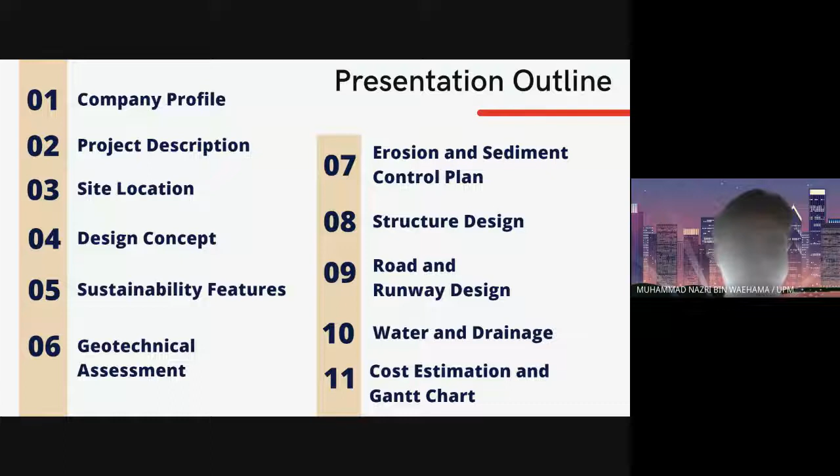Okay, first thing first, our company profile. Trust Maju Consult Sdn Berhad is one of the leading consulting and integrated engineering services companies in Malaysia. Having been established since 2007, our company provides multidisciplinary integrated engineering services.

These include civil, structural, geotechnical and other related engineering disciplines for over 14 years. We embrace innovation to provide clients with innovative, sustainable and livable solutions, solving infrastructure and urban challenges. We work with different clients on diverse types of projects, including aviation, tall buildings, water, roads and highways.

We are very proud to be the designers and consulting engineers with an impressive track record of designing some of Malaysia's most iconic landmarks, including major projects such as KLIA International Airport 2, detailed design and construction supervision for package EF01, Penang International Airport, Sultan Abdul Aziz Shah Airport, East Coast Rail Link ECRL, Kuala Lumpur City Centre KLCC, and Kuala Lumpur Central Station.

TMC is led by a team of experienced professional engineers, with team members registered and accredited with professional bodies such as the Board of Engineers Malaysia and the Institution of Engineers Malaysia.

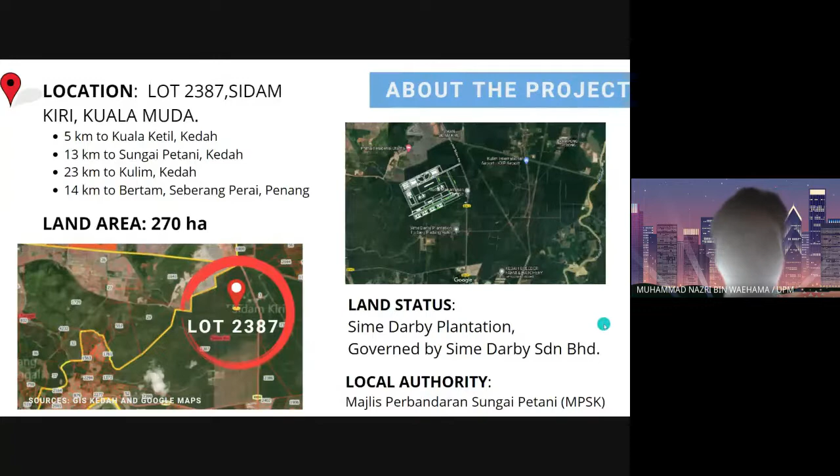We move to the project objective. Trust Maju Consult are the consultant for the project, which is the cadangan membina.

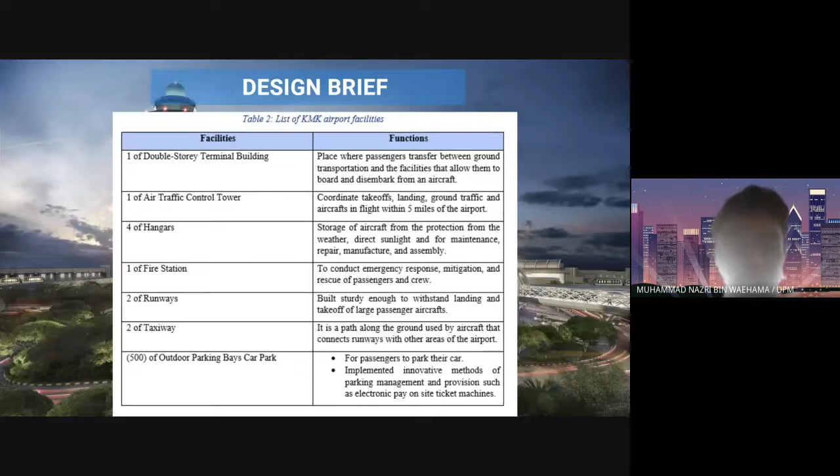Okay, for our design concept. Nazri, can you hold a little bit? Can we have Alia present on this? Thank you, thank you.

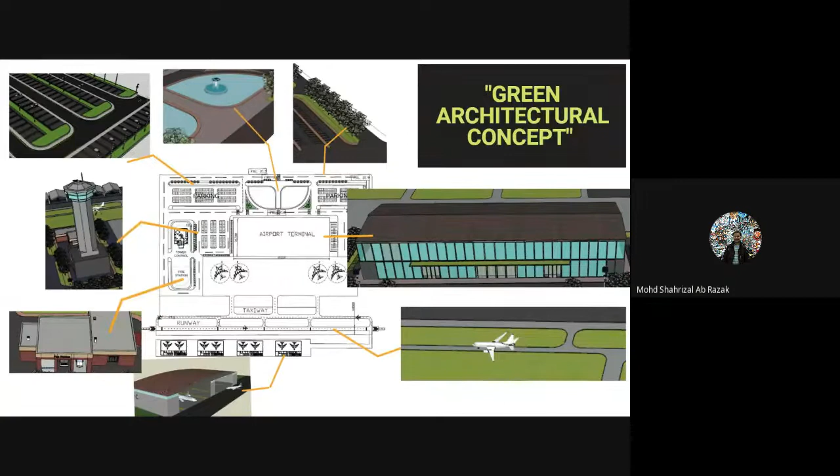Okay, now. Hello, dengar tak? Ya, dengar. So we move on to the design concept.

Our design concept is a very important aspect for Kedah, especially in the tourism aspect. The design of the airport terminal is mainly taken from the concept idea of Changi Airport, Singapore, and also the Tamarind Square, Cyberjaya, with the concept of a green architectural airport.

As we can see from the building layout plan, the parking area incorporates elements of green connectivity. Incorporating green spaces in this urban area is not just adding a touch of nature to the landscape. To maintain this sustainability, it is necessary to have the green roof system that many building structures implement. This green roof, implemented in the terminal airport, contributes to sustainability efforts by conserving energy through insulating the building and mitigating the urban heat, which reduces the need for cooling.

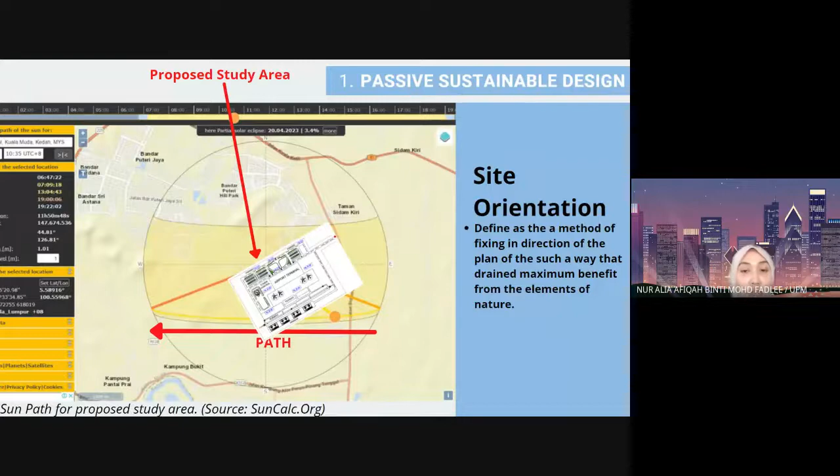As we can see, site orientation is important as it defines the method of fixing the direction of the plan in such a way that brings maximum benefit from the elements of nature. The site location is also placed based on the consideration of more sites facing east and fewer sites facing west. This will ensure the maximum use of natural sunlight and reduce the usage of electricity.

Next, wind orientation also plays an important part here. We can see the effect of wind on takeoff and landing. According to the relevant regulations and standards, it states that aircraft should not land with the wind on the side, nor take off and land with a tailwind.

So it is better to take off and land against the wind, but the headwind should not be too strong. When we determine the direction of the runway, the guarantee rate should not be less than 95%, because according to the Malaysian Meteorological Department, the annual mean wind speed is 1.8 meters per second. This is why we oriented our design like this.

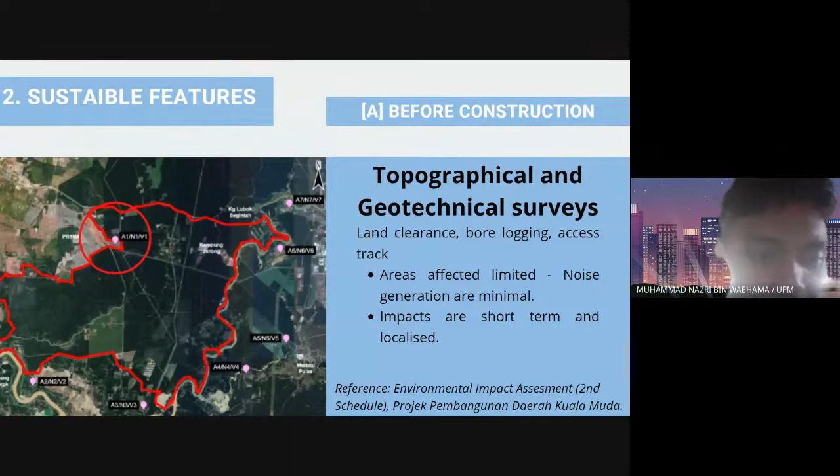Okay, Awad, you present this. For sustainability features, there are three steps. The first one is before the construction, and before the construction, the topographical and geotechnical survey should have been done.

For the land clearance, bore logging, the access track should be identified, and the affected surrounding areas around the site will be limited. Based on the identified sensitive receptors surrounding the project site, attention will be given to the residential area in Taman Sidam Kiri due to its proximity to the project site.

And also in this area, best management practices will be adopted by using low vibration equipment by the project proponent and the appointed contractor during the construction period.

Next, during construction, activity involving heavy machinery, which has high noise, will only be carried out during daytime. Temporary jersey barriers with plastic hoarding will be erected around the project site and active work area, especially at identified sensitive areas. All equipment and machines will be maintained to avoid emitting excessive noise, and development will be carried out in phases to reduce the generation of dust.

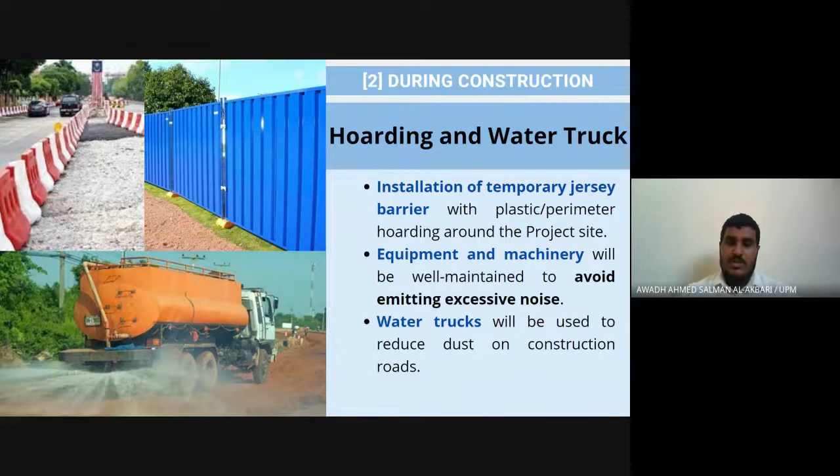Next, after construction, green connectivity spaces will be implemented. Incorporating green spaces in urban areas is not just about adding a touch of nature to the landscape. Urban green roofs or vertical greens and the creation of water features are some approaches to be implemented to reduce the microclimate and reduce the temperature.

The cumulative effect of such practices would bring greater ecosystem services into the urban area, such as improving air quality, reducing storm water runoff, and mitigating urban heat island effects.

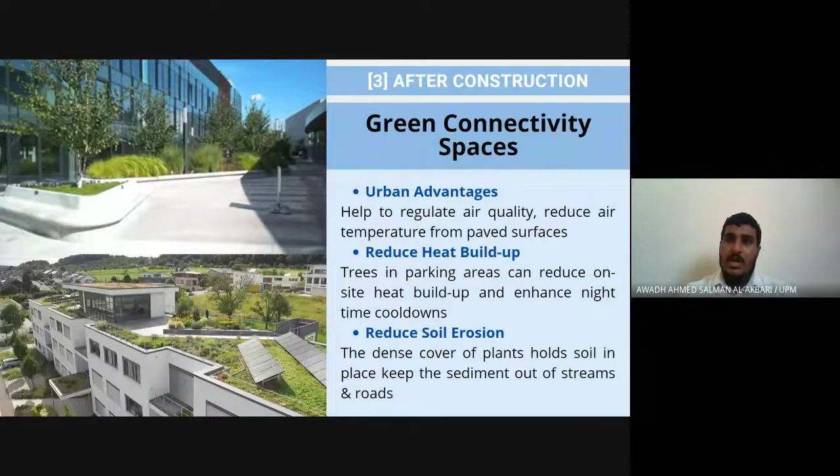Next, here are the geotechnical assessments.

Here I will continue to the earthwork analysis, the second part, the 2D and 3D contour. From the software, a lot of beneficial information can be obtained, such as map contours, cut and fill, and more.

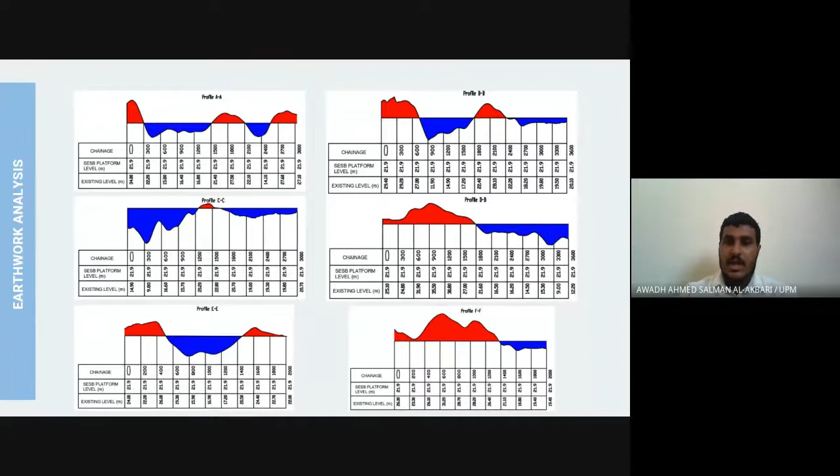Next, here are the cut and fill analysis. From the contour, we did six sections cutting. The proposed level that we have chosen is 21.9 meters.

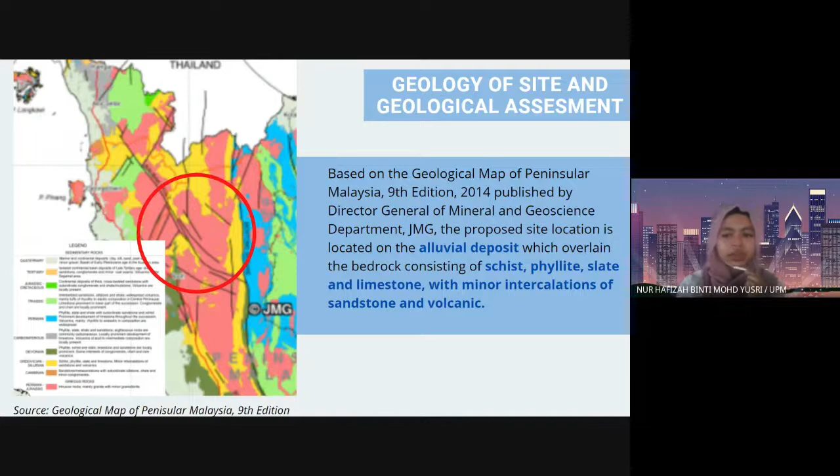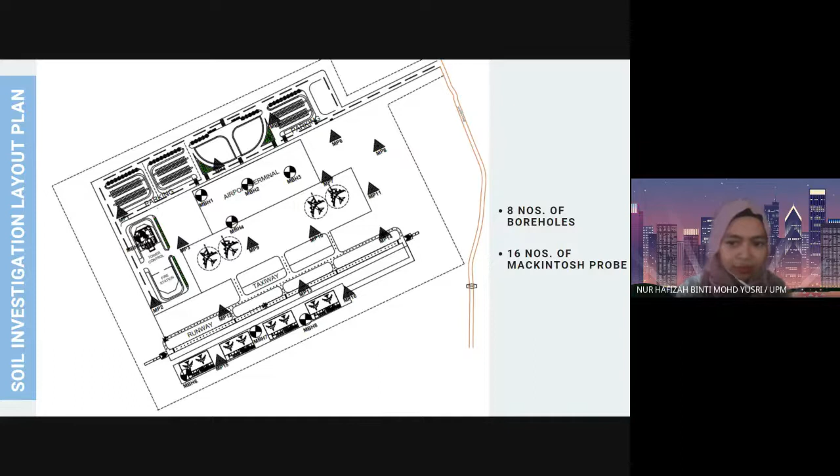This is the layout plan of our airport. This is the investigation layout plan. We propose 8 numbers of boreholes, and 16 numbers of Mackintosh probe.

This is a summary of the borehole profile. We propose 8 numbers of boreholes. The available SI report has only...

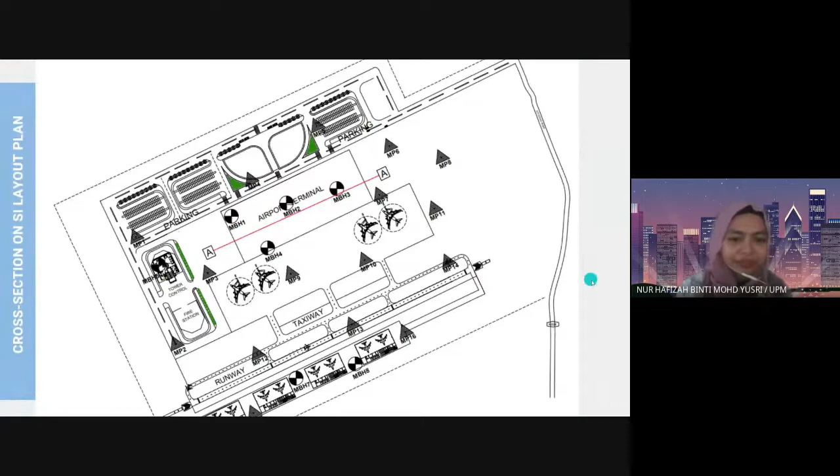See here the cross section AA across the terminal building, studying the soil profile. This is the cross section AA across the 4 boreholes.

Referring to the SPT result in the actual SI report, the top layer can be classified as sandy silt layer, and the middle layer as silty sand. The bottom soil layer is sandy silt. The rock formation beneath is shale.

The layering is further justified by the SPT result. The top layer L1 is sandy silt with SPT-N less than 10 and thickness between 4.5 meters to 9 meters. The second layer is silty sand with SPT-N between 10 to 50.

And a thickness of 1.5 meters to 4.5 meters. The third layer is a silt layer with N larger than 50 and a thickness of 3 meters to 15 meters. The rock layer beneath is shale with RQD of 0%, which is highly fractured and highly weathered.

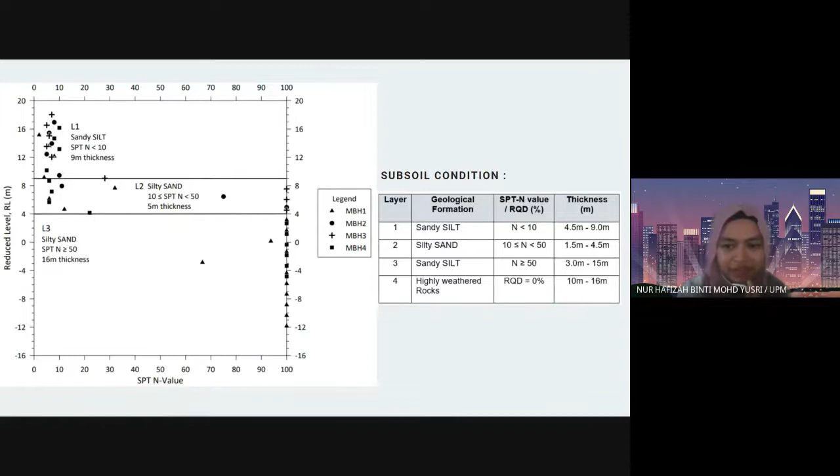This is the physical properties of soil. The plasticity chart is constructed based on the Atterberg limit test result. It shows that the majority is silt with plasticity ranging from low to intermediate plasticity. Clay is minor, with high to extremely high plasticity, with only 3 out of 12 soil samples tested as clay.

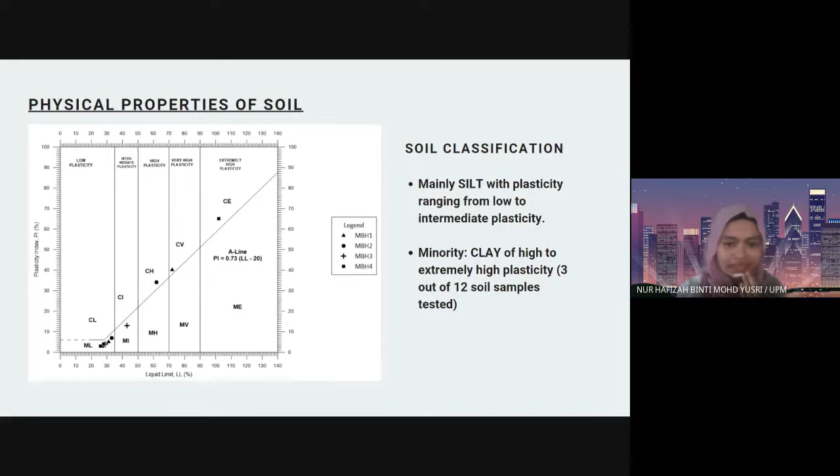Moving on to the chemical properties of soil, there is no trace of acid attack, sulfate attack, or chloride attack. The soil is slightly organic.

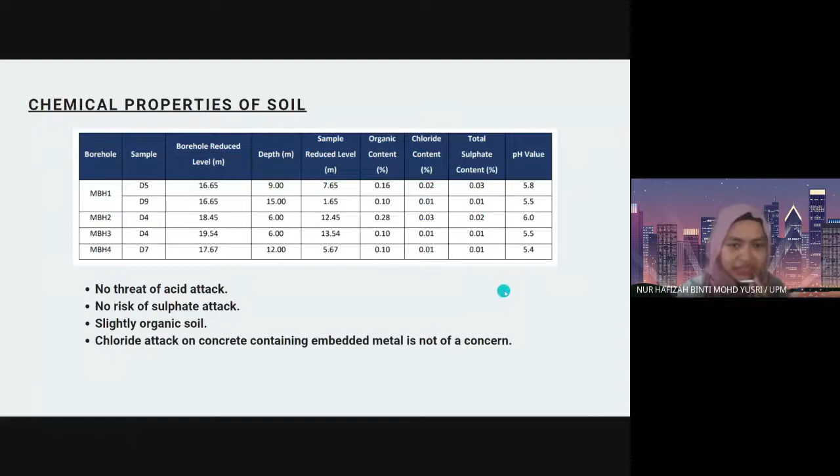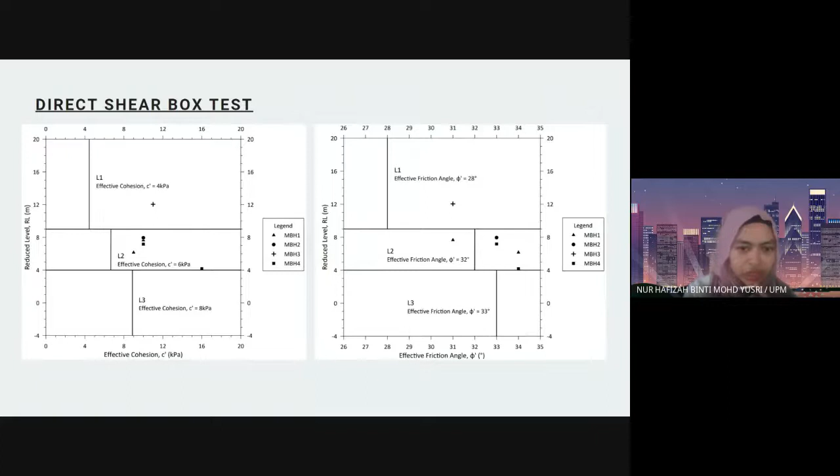This is a summary of a direct shear box test. The effective cohesion and friction angle for each layer is determined, which will be presented in the next slide.

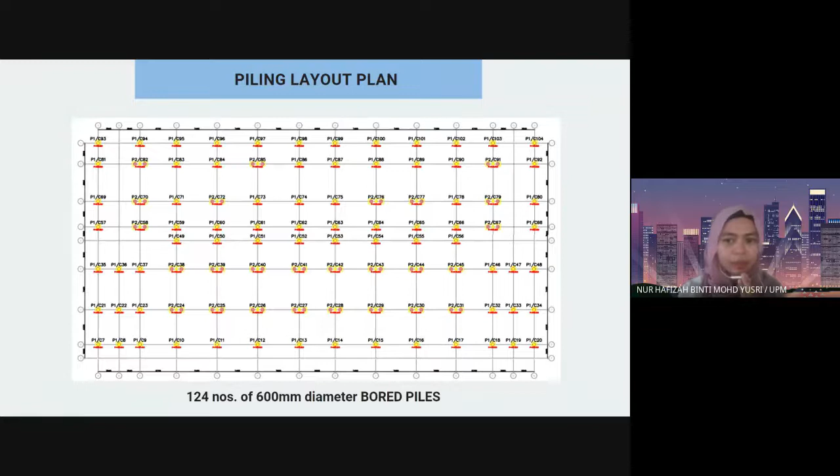This is a piling layout. A total number of 124 bored piles are being proposed, consisting of single pile and 2-pile group. The bored piles are 600 mm diameter.

The pile cap design is done manually as well. It shows that the proposed size for pile cap 1 passes with main reinforcement size of 16 millimeter, 6 rebars.

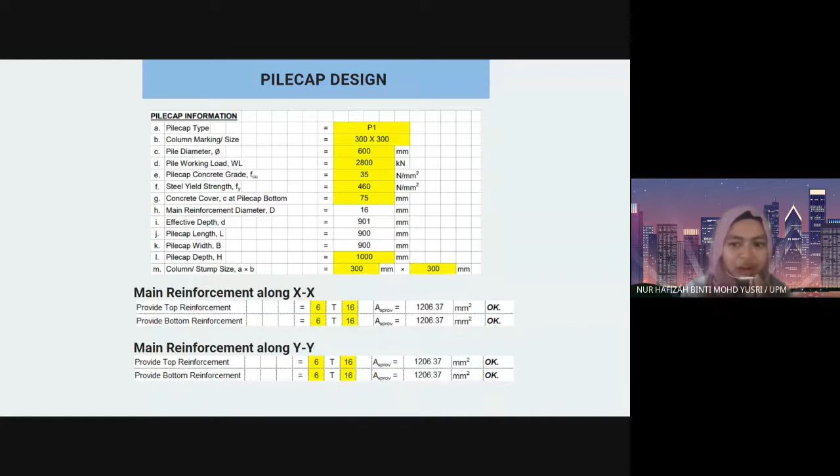This is a summary of the proposed erosion and sediment control plan measures. The sediment basin is proposed to collect and hold the runoff, allowing suspended particles to settle out before the runoff leaves the site. The proposed size for the sediment basin is 47 meters length, 15 meters width, and 2.2 meters depth.

Next is the wash-through, a temporary wheel washing system installed at the exit of the construction site to prevent sediment from being tracked onto public roads. The size proposed is 4.5 meters width and 9 meters length to fit all vehicle types.

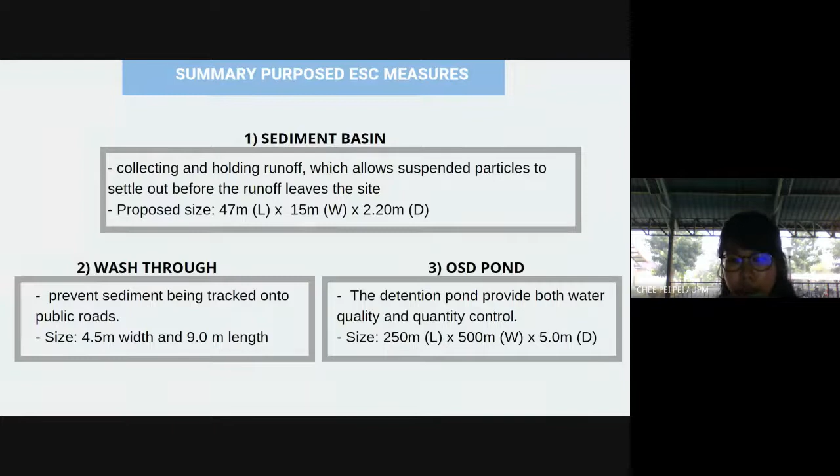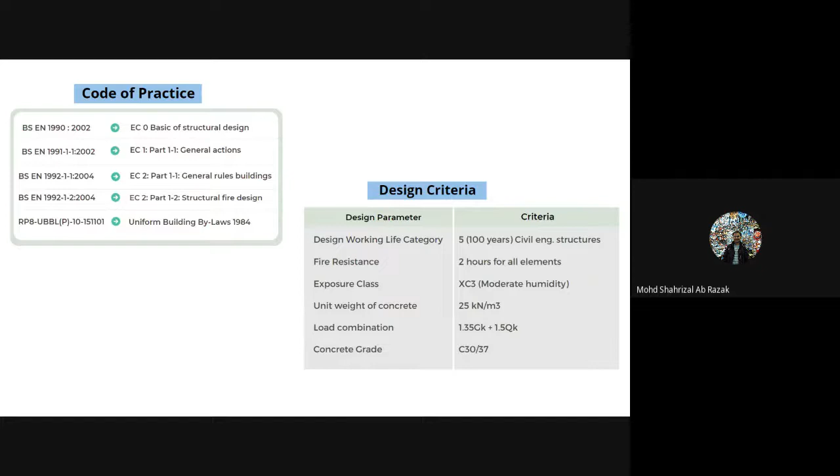This is the basic design information on structure analysis and design. The codes of practice used are Eurocode for analysis and design, and Uniform Building By-Laws mostly for loading values. The design criteria is as shown.

The design working life is in category 5, indicating 100 years of working life, as the airport is considered a civil engineering structure. The fire resistance for the airport is 2 hours for all elements, and the exposure class is moderate humidity. The unit weight of concrete used is 25 kilonewton per meter cubed, and the load combination used is 1.35 GK plus 1.5 QK. The concrete grade is shown next.

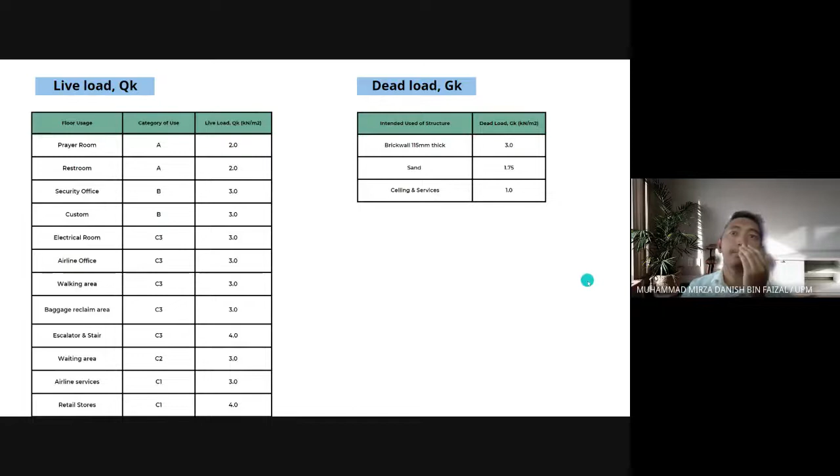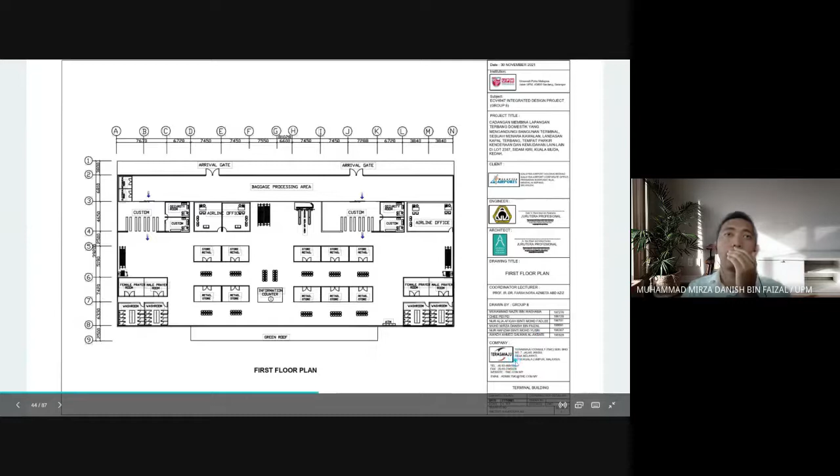In the design and detailing parameters, the beam and column sizes vary to achieve an optimum and economical design. The beam sizes used are 200 by 500 millimeters, and the columns range from 300 by 300 millimeters to 350 by 350 millimeters.

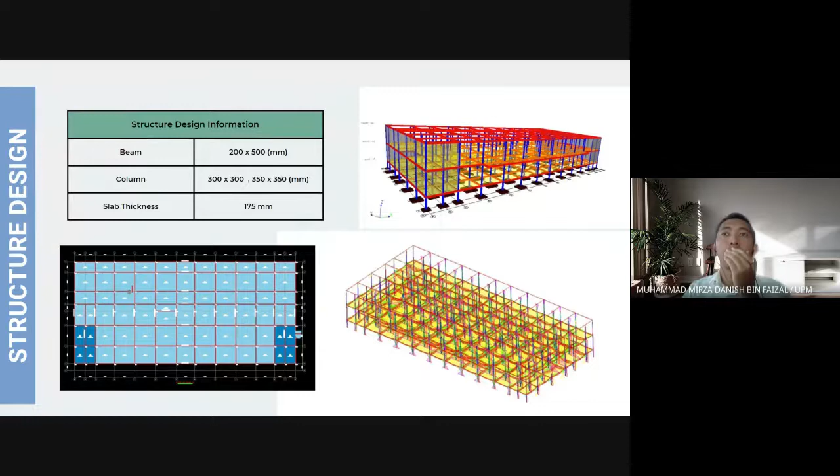All the slabs will be 175 millimeters thick.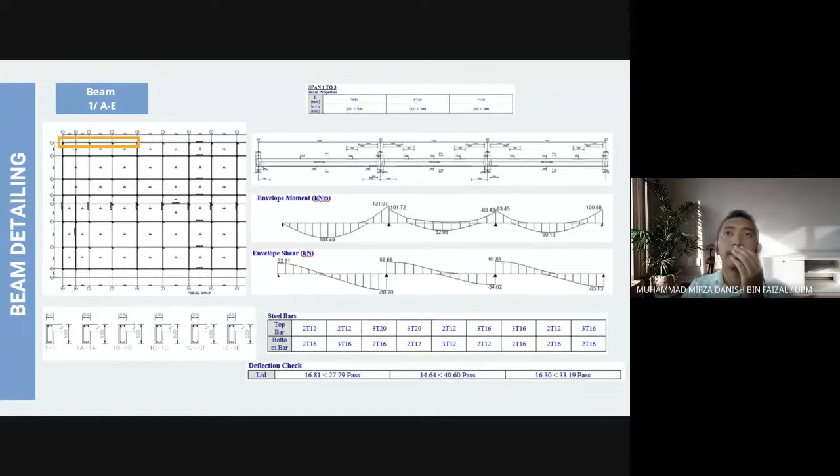This is the slab detailing. All the slabs are 175 millimeters thick. For the detailing of slab A/2-3, we can see that the top reinforcement has a steel bar diameter of 10 millimeters with a spacing of 250 millimeters.

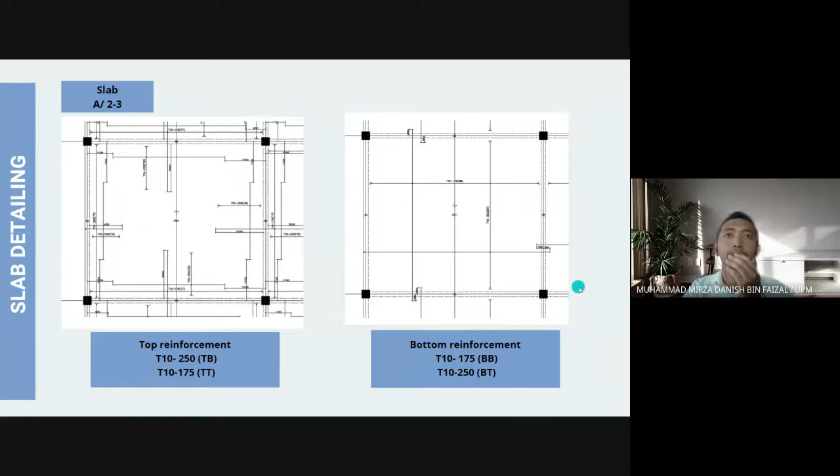Okay, let's move on to the road and runway design.

Okay, Nazri, you take over this.

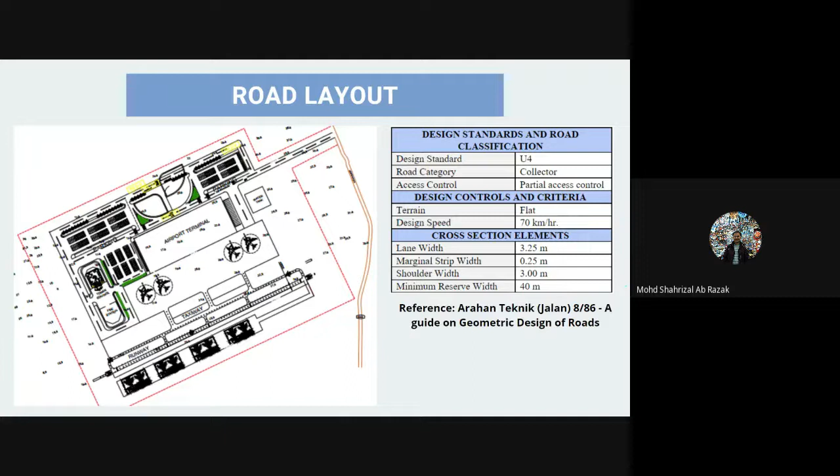Okay, let's move on to the road and the runway design.

This is the road layout for our domestic airport, which consists of two-way roads that are well designed for the airport users. All the road parameters are designed in accordance with Arahan Teknik Jalan 8/86, a guideline on geometric design of roads. The proposed road is classified as an urban road with design standard U4, with lane width of 3.25 meters, marginal strip width of 0.25 meters, and shoulder width of 3 meters.

For the pavement design, our proposed road is designed based on Arahan Teknik Jalan 5/85, the manual on pavement design. This is the cross section of the proposed road, and to determine the pavement thickness, many parameters must be taken into account, such as the average daily traffic. Therefore, the thickness required is 50 mm for the wearing course, 150 mm for the binder course, 200 mm for the base course, and 200 mm for the sub-base course.

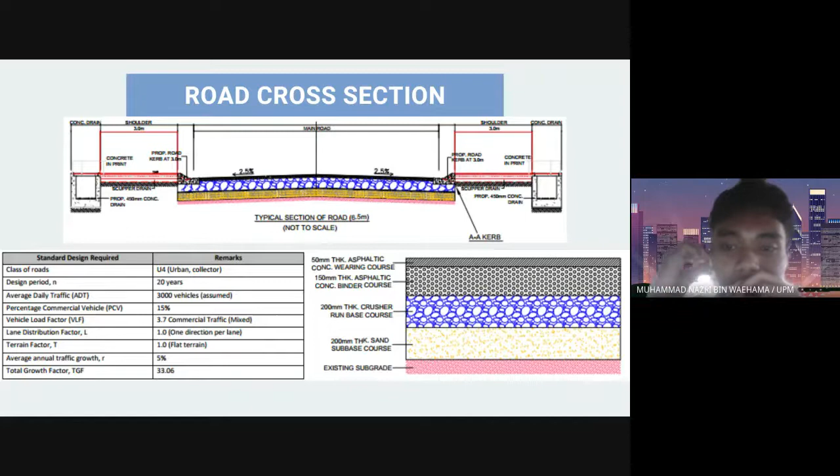For the parking layout, here is the parking layout of our domestic airport. The parking is designed based on the minimum length and width of parking for each type of vehicle that can be determined. For our airport, the total parking available is 531 units in total.

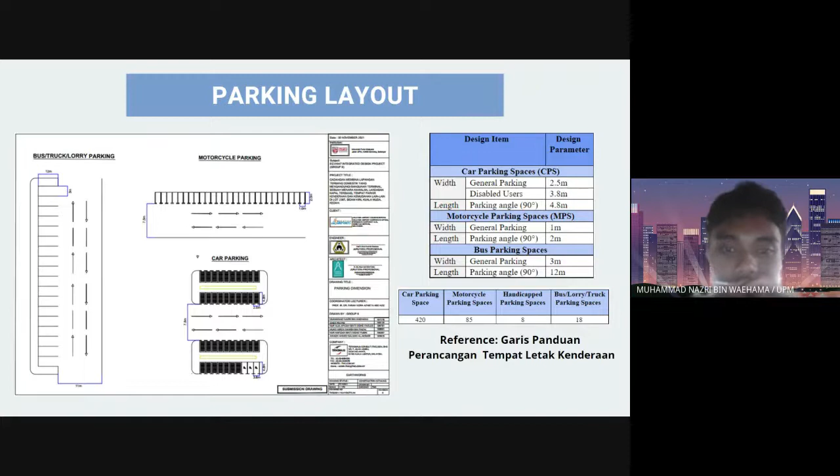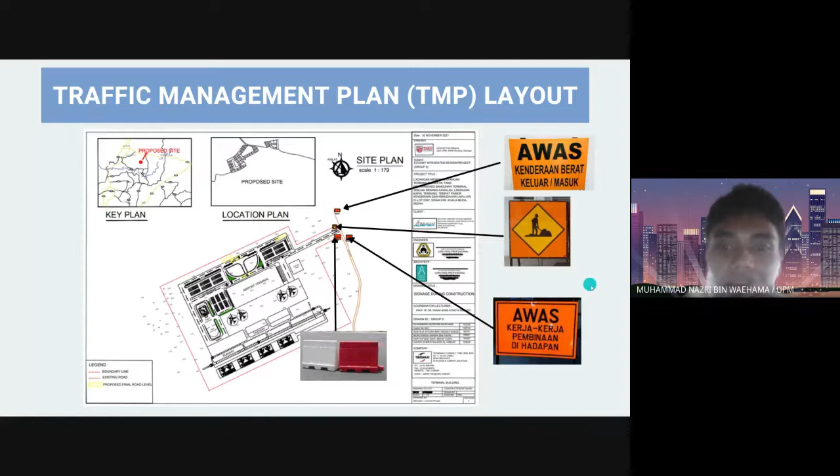For the traffic management plan (TMP), it was designed to identify how the activities on the road will be carried out, so it can minimize inconvenience and ensure road users and workers remain as safe as possible. It provides enough temporary signs to ensure the surrounding site is free from hazard and to protect road users from any obstruction.

Here is the summary of our Traffic Impact Assessment (TIA). The proposed development is located near residential areas and is governed by Majlis Perbandaran Sungai Petani (MPSP). The road type is a three-way junction road located at Jalan Kuala Kecil, Sidam Kiri, Kuala Muda, with a single carriageway. The lane width is 7 meters as it is a dual lane road. The level of service is assumed to be B, with a volume-per-capacity ratio of about 0.41. The traffic condition is in stable flow, with operating speed beginning to be restricted somewhat by traffic conditions. From this assessment, to improve traffic, we propose junction modification of the existing road with provision of a physical curb or median at the approach of the junction to prevent illegal turn movements.

We also want to propose installing a speed sign to reduce the speed of vehicles at the junction of the existing road.

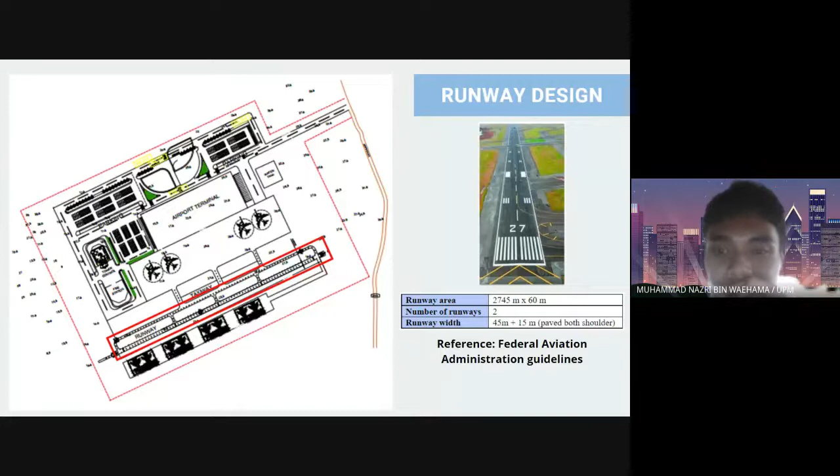Let's move on to the runway design, where the design is based on Federal Aviation Administration guidelines, with code number and code letter that must be determined in order to obtain the runway width. Based on the guideline, the width of the runway obtained is 45 meters and the shoulder width is 15 meters.

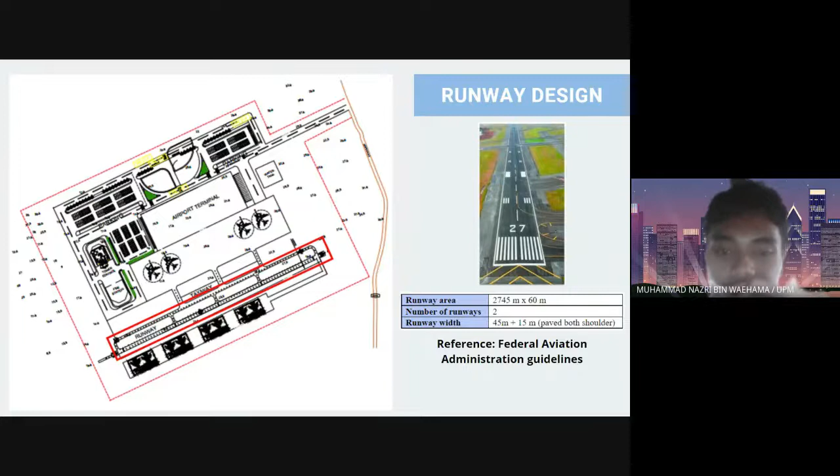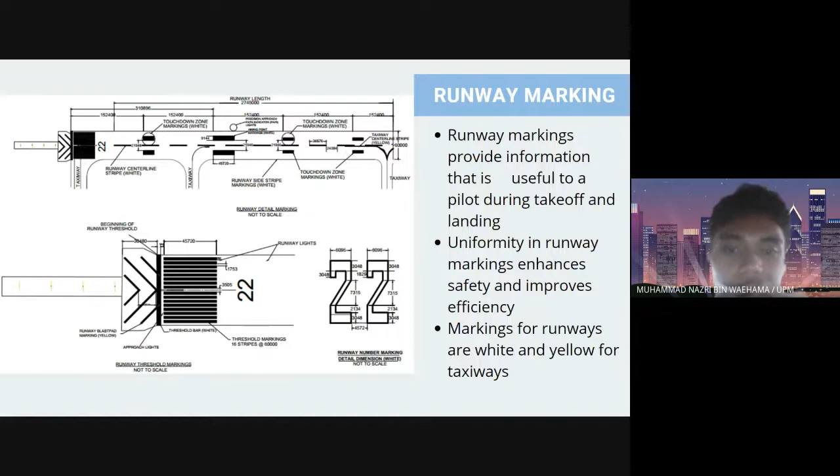Here is the drainage layout plan, where the water... Pepe, you take this.

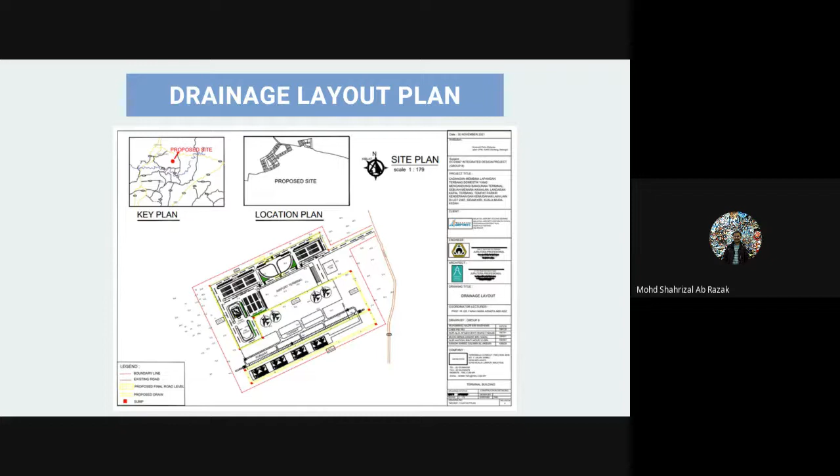This is the drainage layout plan. The water will flow from a high elevation to low elevation, and eventually it will end up flowing to the existing drain. Break sumps are added to the drainage when the water changes flow direction.

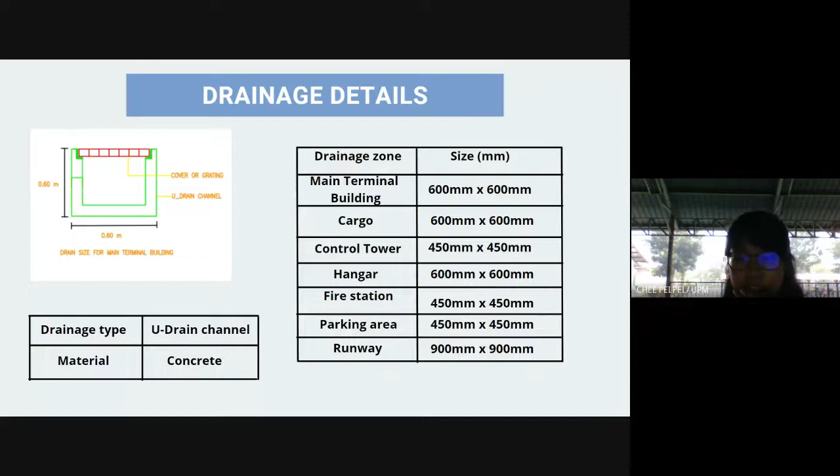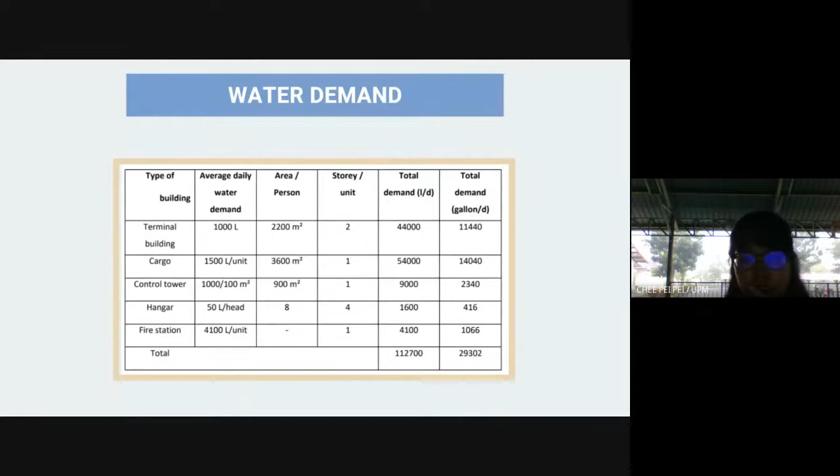The water demand for each airport building is calculated according to Table B1 of the Uniform Technical Guidelines for Water Reticulation and Plumbing. The purpose is to increase the water availability and consumption of water usage for the airport. The total demand for all of the buildings is 112,700 liters per day.

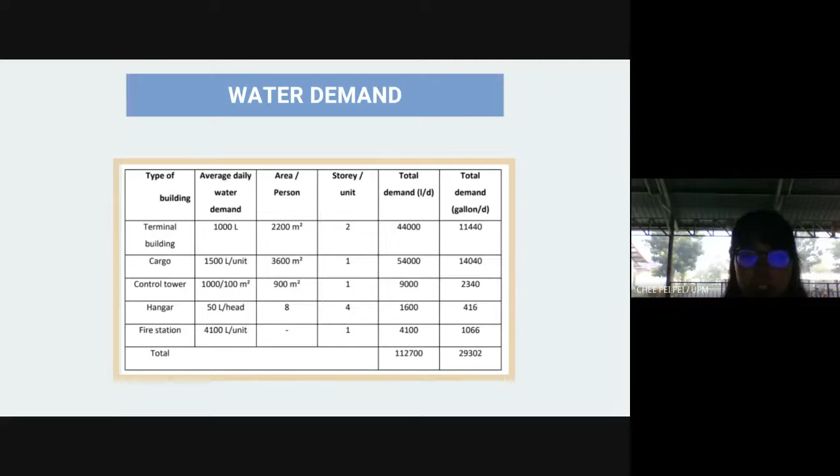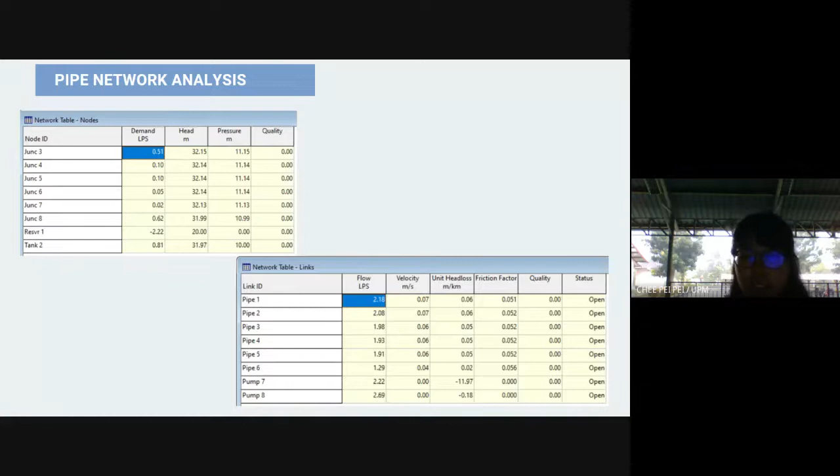This is the pipe network analysis. The pressure for each node is 15.83 pound per square inch. The water flow in pipe 1 and 2 is greater than others because of the velocity. When the velocity is high, the water will move faster, so the flow rate will be increased. So from this, we can see that the greater the flow, the greater the rate of head loss.

For the flow rate, it can be observed that when the flow rate increases, the friction factor will decrease. This is because when the flow increases, the viscous force on the walls of the pipe will be reduced.

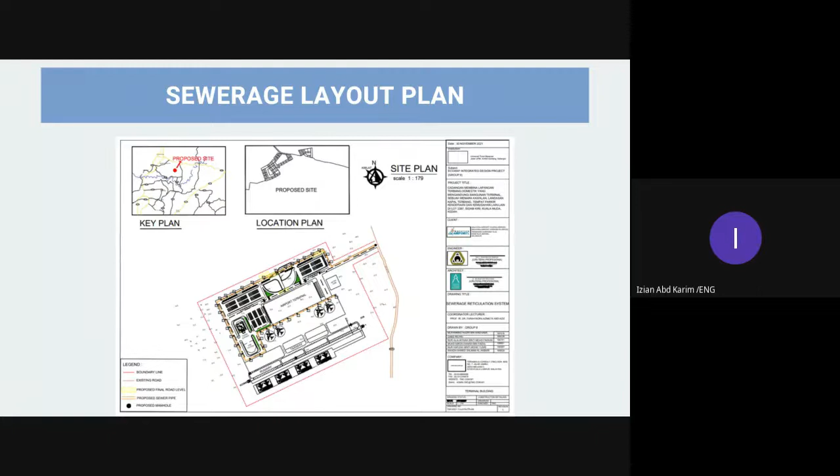Next is the layout of the sewerage reticulation system. The sewerage design follows the guideline from the IWK. The sewer pipe is connected to the nearest water treatment plant, which is Kuala Ketil Water Treatment Plant. The sewage will flow and discharge to the existing manhole near the main road.

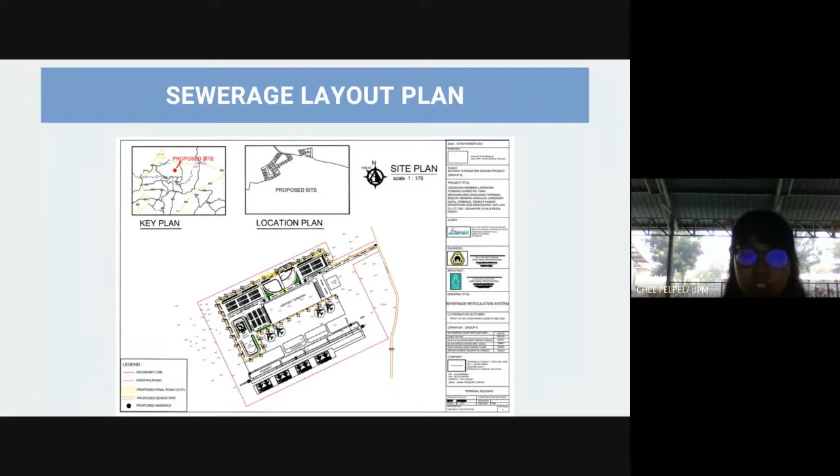This is the longitudinal section of the sewerage system. The fall for the manhole is 0.1 meter with a starting depth of 1.2 meters. To get the invert level, the proposed road level is subtracted by the depth. The invert level will decrease as the depth increases.

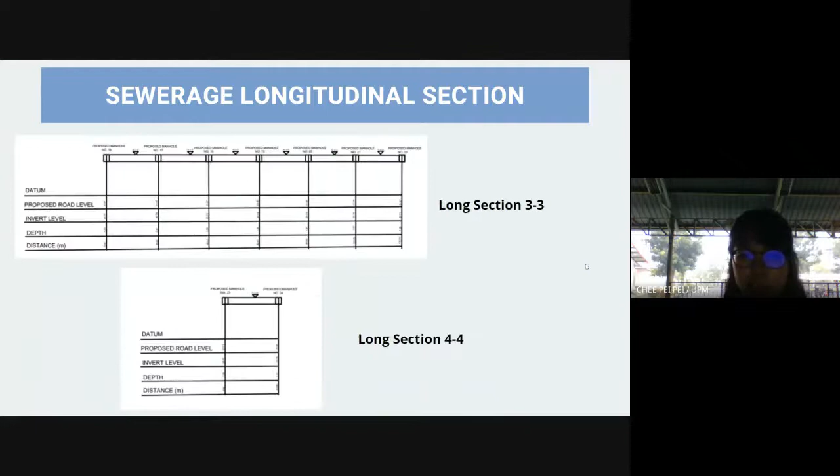This slide is about the manhole details.

The PE for airport passengers is 0.2 per passenger per day, and for airport employees is 0.3 per employee, so the population equivalent is 840. The type of manhole is precast concrete with 36 manholes. The manhole cover is ductile iron, sized 840 mm by 840 mm by 100 mm thick.

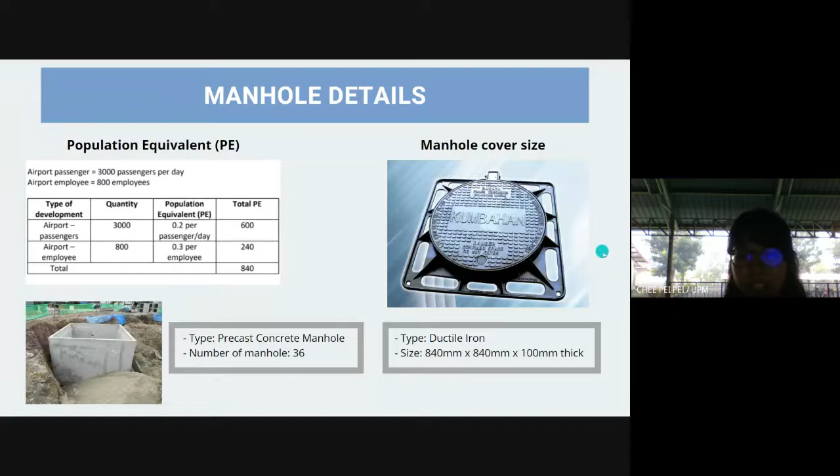Next. Moving on to the cost estimation and project management.

Yes doctor, for the cost estimation and project management, we estimate the total cost of Kuala Muda Kulim Airport with the sustainability features is about 305 million.

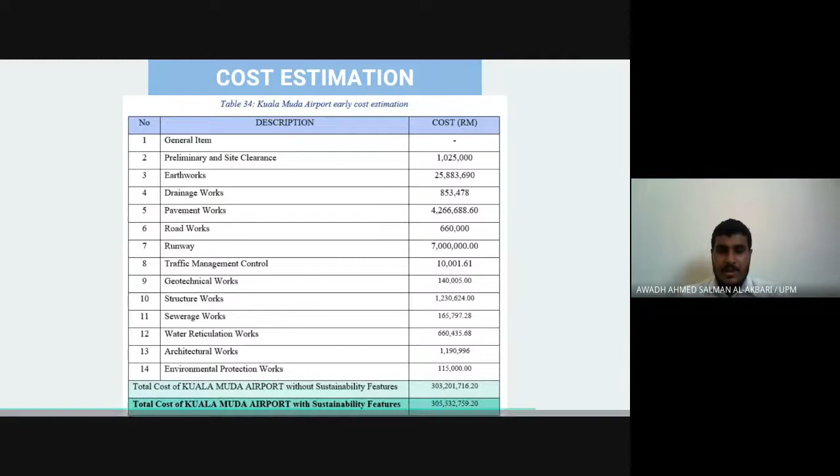Next, here is the general overview of the work management through the Gantt chart, which will be summarized in the next slide.

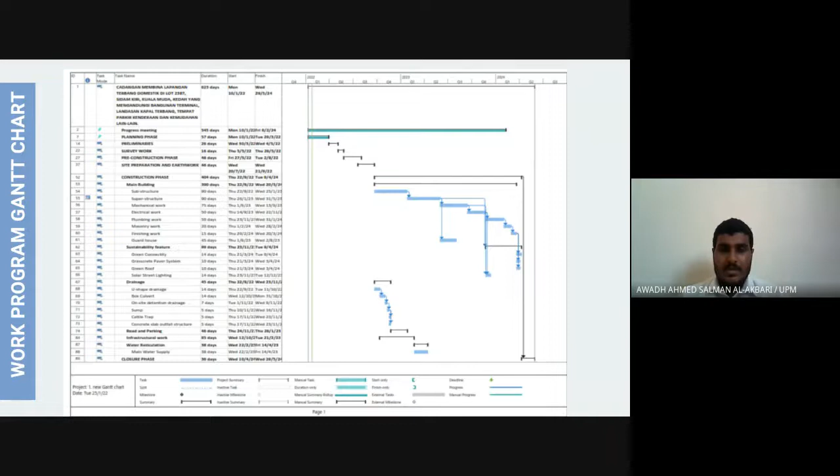There are seven milestones for this project: the planning phase, preliminaries work and survey work, pre-construction phase, site preparation and earthwork, and construction phase and closure phase. The activities are linked to each other, and the distribution of work followed the work breakdown structure and duration to avoid construction delay.

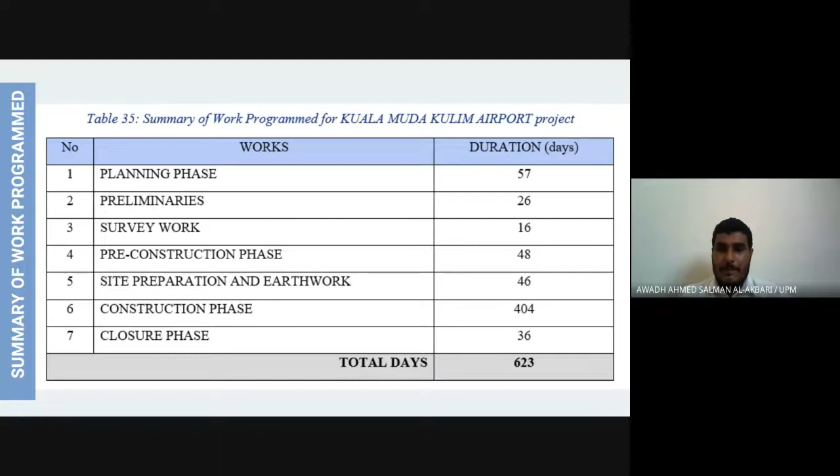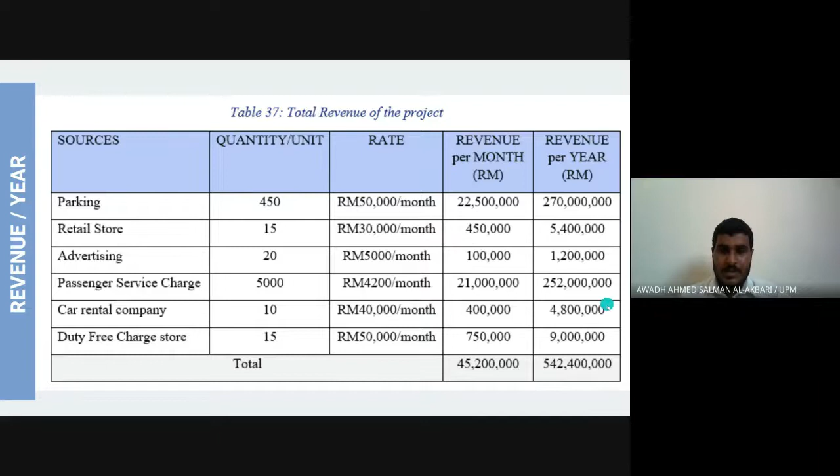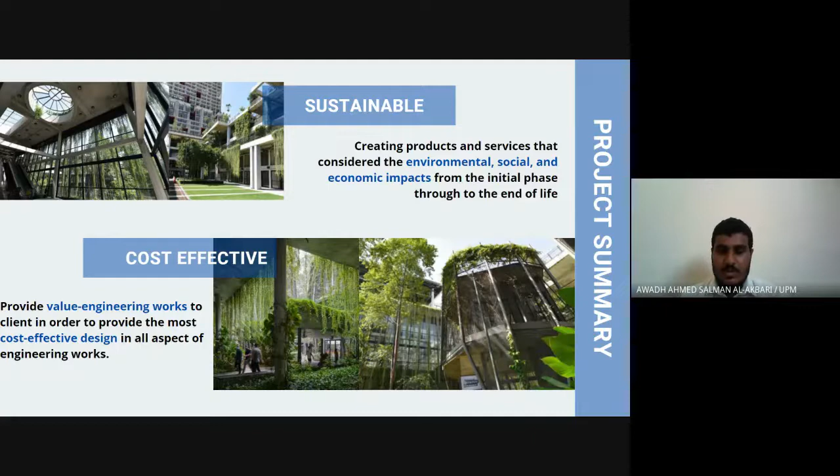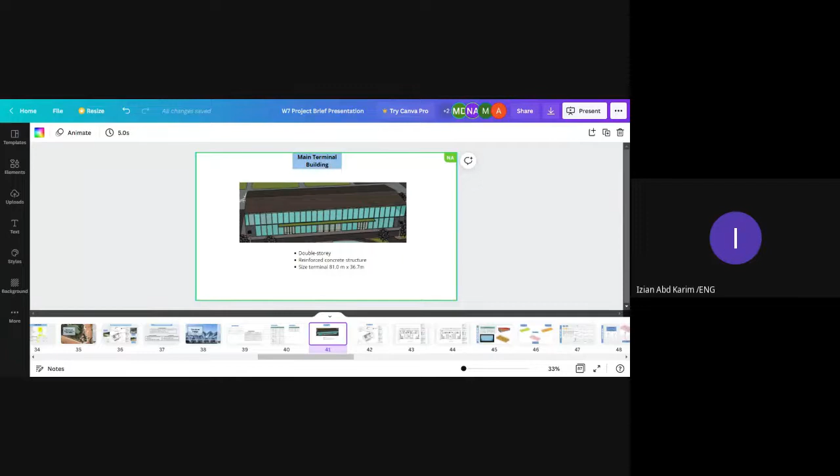Where is the green roof? The one you said you wanted to do. Yes, doctor. It's in my structural design. Where is it? Is it all over the top of your building? No doctor, only above the ground floor, near the first floor slab. I only put it at the front, not on all the floors.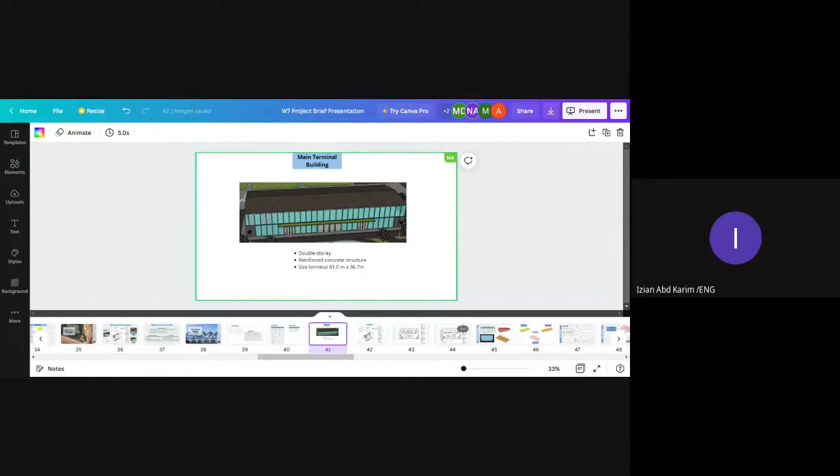Okay, but in your structural design, this is like a lobby roof, right? Lobby roof, yes doctor. But in your structural design, where is the lobby roof? I cannot see it here. It's very small, doctor, only 2.5 meters. I know it's 2.5 meters, but this bottom-left one, the blue colored one, where is it? Where is the green roof?

Oh, in this layout, this is the ground floor. For the first floor, I did not put it in the slide. In the 3D design also I don't see it, it's not visible there.

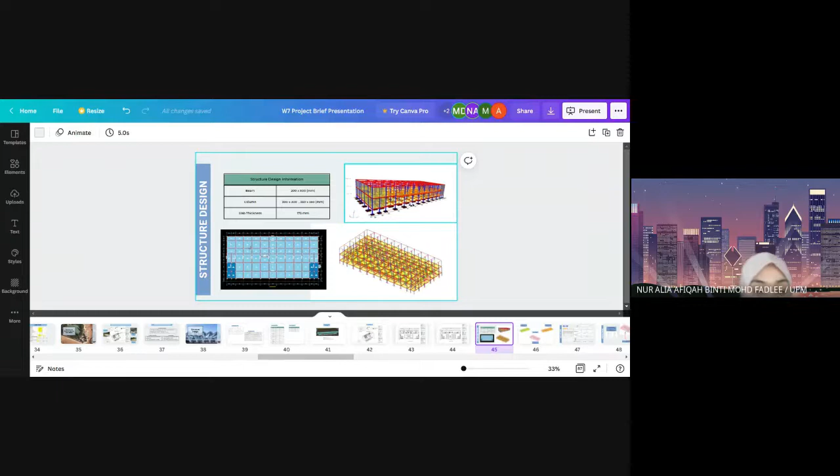Ya doktor, but it's small. No, it's not small, it's not visible. I should see because I can see a line of column and footing there that indicates the first facade, but where is the extension of the other column of the lobby? Doesn't the lobby have a column? You don't have a column there, lobby.

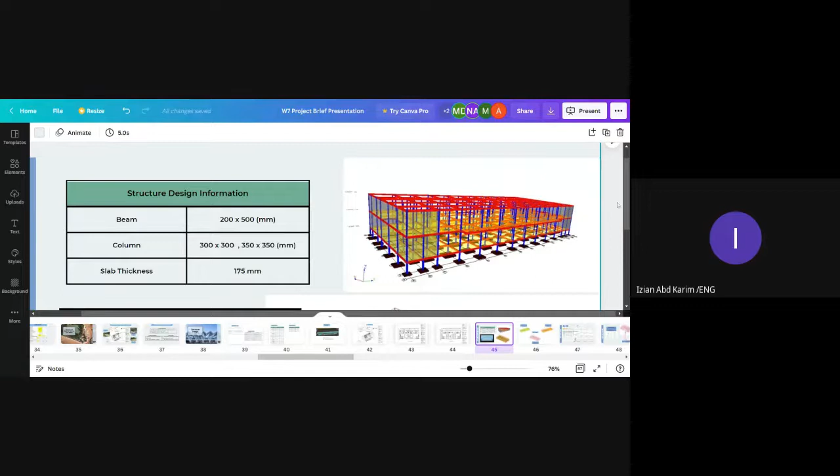Cantilever? You put the slab and then you don't have column, and then you put a tree there. The tree will collapse, not the ground collapsing, the tree collapsing. Okay, so that one, okay doktor. Alright, okay then, is that settled?

Okay, and then for the foundation, you submitted to me the appendix of manual calculation, using Excel for the pile cap design and so on. I'm referring to page 51 in the appendix. This calculation or design that you have submitted here is not correct. There is some value that I need to see and check, but the value in the cell of this Excel says it is not applicable. I don't know how much is your moment, and I don't know how much is your AS required.

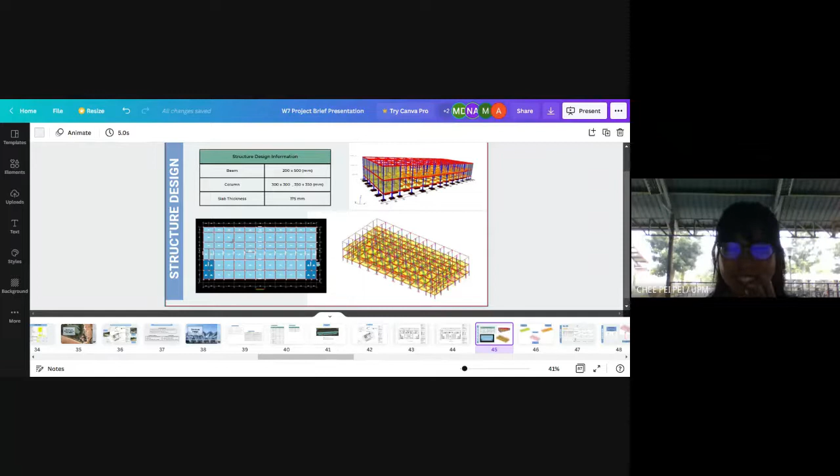All that you have here is AS provided only. So what do you expect me to do, to check? How do I check? Sorry doctor, I didn't notice that, I will check on that. Okay, so I don't know either if I look at it like this, so it means there's no point designing it. There are many values I need to check and compare, but I cannot see them, it is not applicable there. Okay, so that is all from my side, thank you very much.

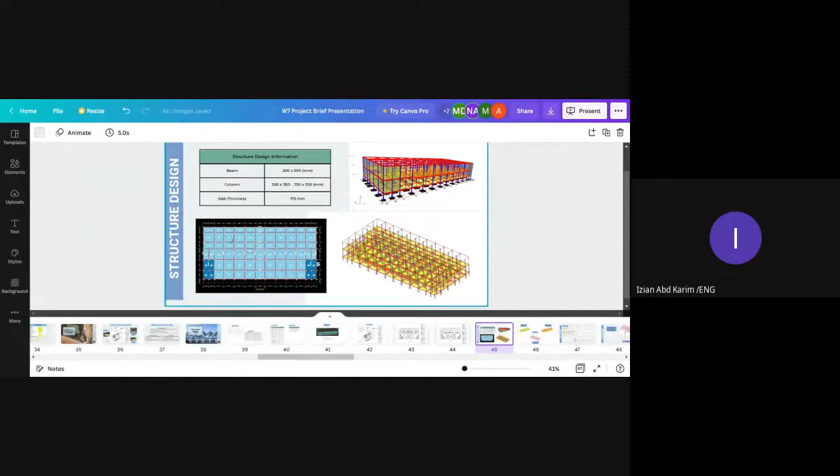During the presentation by Mirza just now, I saw there is one slide with too many columns. Is it the right one, which one, if you can show the slide with many columns just now? This one, how many columns do you have? This is for the first floor.

Who did this? The whole terminal building, doktor. The whole terminal, first floor and second floor. Ground floor and first floor.

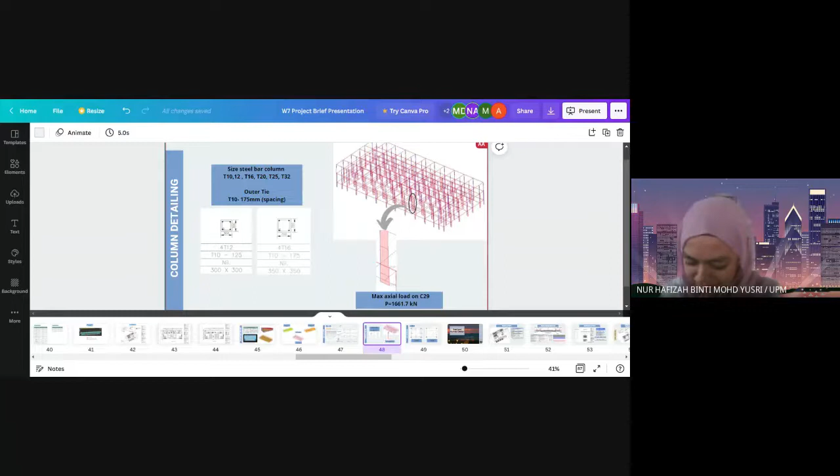Okay, you have to check what type of pump you want to include because you have the above storage tank there.

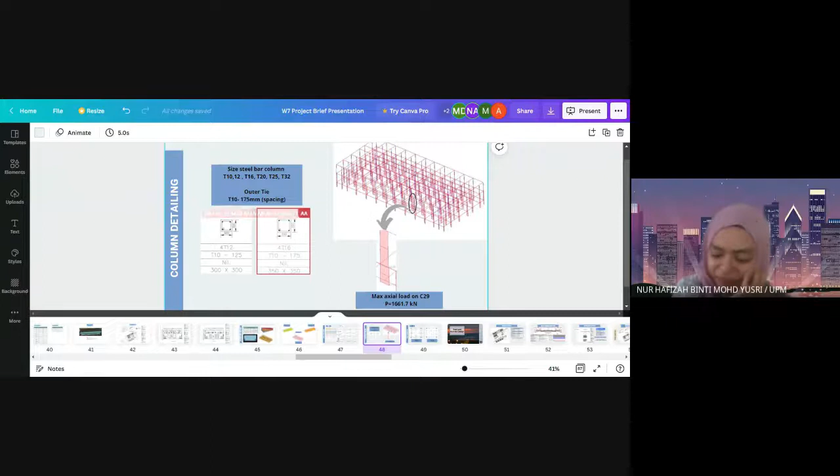And then I heard also Chee Pei Fei mention about the Hazen-Williams coefficient that you use is 100, yeah? Yes, sir.

As far as I'm concerned, using the uniform technical guideline from SPAN, because you are utilizing the HDPE pipe, your Hazen-Williams coefficient should be higher, which is 120. If you are using the ductile iron or steel iron pipe, then it's okay for you to have a Hazen-Williams value of 100.

So what is the head loss that you obtain from the computation per 100 meter length? 0.05. Oh, very low, huh? Yes, sir. Very low. Okay.

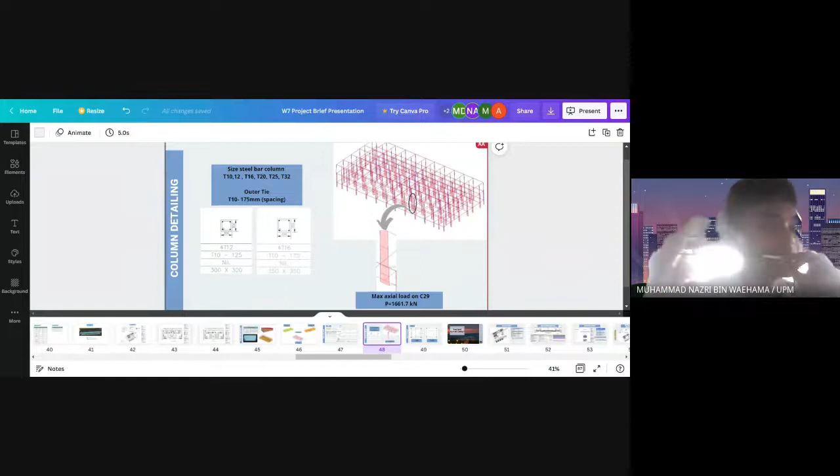So as I learned from my internship experience, the detention point is actually going to cater this kind of point constructed during construction, which all the water inside the site will be aligned to this detention point. This type of detention point will have like a GPT, gross pollutant trap, and all that, before it goes out to the stream flow.

Is it a temporary or permanent structure? This type of detention point is actually temporary, but from my internship experience, there are a lot of detention points, and some of them will be permanent, because it's going to be like a recreational park, like a jogging place, which depends on the development, whether they want the temporary detention point, or maybe they want to build it as permanent.

So if you want it to be a temporary structure, then why do you propose to have the wet sediment basin? It is also a temporary structure.

The wet sediment basin, OSD... So should we build the dry one, is it? That's your question, is it? Yeah, if you want to control the sediment during the construction process, then you just need to have the wet sediment basin, rather than have the OSD.

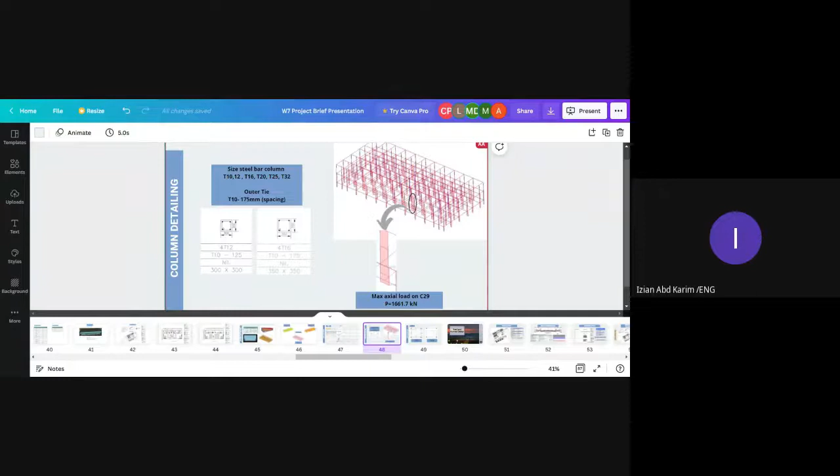Dr. Izian is not here. Dr. Hilmi, do you want to add more or is it okay? Okay, everything's okay.

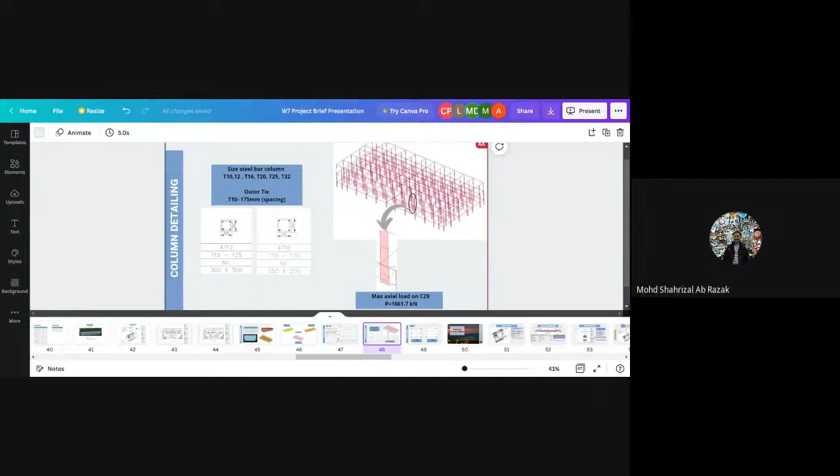Should we mark your report based on the one that you have submitted, or are you going to resubmit a new one? You're going to resubmit later, by Monday, same due date.